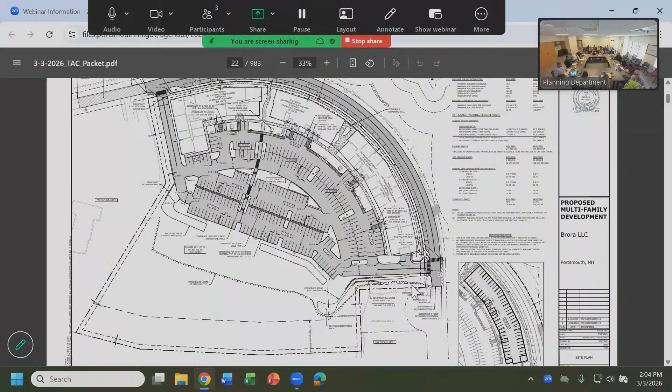I think the definition says in between buildings, so it's on the end of a building - maybe it could just be included in the park. Okay, which is, even though it's across the street, could be part of it. As long as you provide - is there a crosswalk there? You could provide it, well, they can go across the crosswalk, so you just include it and not call it a pocket park. Okay, easy enough. Great. Yep, we will do that.

The next one's related to confirming the rim elevation of PTD 1. The rim elevation of that trench drain is currently proposed above the flood elevation of the downstream connecting manhole in the 100-year event, so that should be okay, but we can confirm it further.

The next one: shift PDMH 103 north a bit to ease the flow path. Agreed, we will shift it slightly to the north.

Number 4, I touched on it, but this has to do with removing portions of the head wall. There's comments about the design of the drainage related to the emergency access road. I think I touched on that at the beginning.

Number 5, confirm in writing the entire run of sanitary sewer from SMH 1398 to PSMH 1 is currently 8-inch PVC. So Tighe & Bond agrees to investigate that further and coordinate it with the Department of Public Works.

Number 6, the proposed fire hydrant on the south end of Building C should be located 40 to 50 feet south on the opposite side of the road, about 10 feet past the asphalt sidewalk. The hydrant will be relocated accordingly.

Number 7, full width pavement repairs, mill and overlay need to extend up and completely repair the roadway in the area of the power extension. We've been looking at this further. We think there's an opportunity to put the duct bank under the new sidewalk we're already constructing, so we plan to look at that further. We looked at it preliminarily before this meeting. We think it's a possibility, so what we asked for there is just a stipulation that we continue to work with the Department of Public Works and PSNH on the final design of the electric layout.

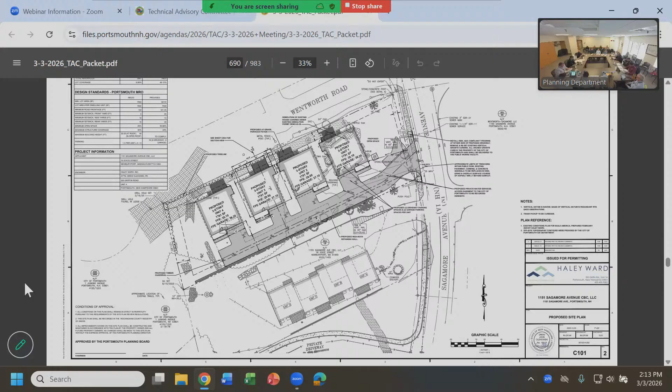Any comments, questions from TAC members?

If none at the moment, I'll open it up for public comment. Anyone here wishing to make public comment on this application? On Zoom, if you're on Zoom, raise your hand. All right, seeing none, we'll close the public comment portion and open it back up for further discussion or motion.

So the idea on the new curbing instead of the guardrail is that you can plow right over it? That's correct, yeah. And we did leave a gap there just for stormwater runoff relief, just to get from that gate, the driveway to the forebay.

And how's that plow gonna turn around? Have to put back into somebody's driveway? That's the idea, he'll have to coordinate with the residents. Does that turnaround also pertain to like an ambulance getting in and out of the site? So we didn't provide a fire truck turnaround just because these buildings will be sprinklered, so that wasn't required. Again, it is the idea that they will have to back out or use those driveways.

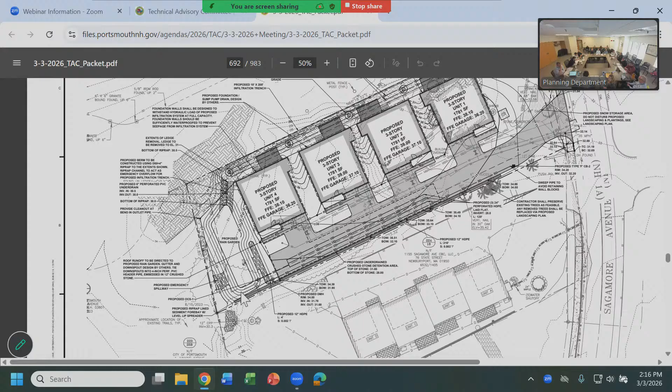So in that emergency spillway at the very back, what storm is gonna cause that to activate? We actually didn't run a storm that even reached that spillway. We have sized that infiltration system in the adjacent driveway to accommodate the 50-year storm, so we didn't even check to see if that's needed. It's really just like absolute worst case scenario, if something gets clogged or something like that, it'll be used. But any of our models didn't even reach that point. Okay, great.

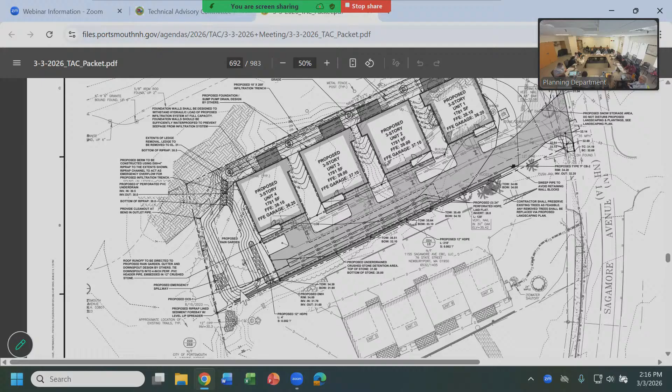Are you guys all set? Stipulations? I'm all set. I'll make a motion to approve. What kind of stipulations do we need? We don't need a CMMP on this. Unless you guys have things you're still working on, I think. No. Let's make a motion to send to the planning board with a favorable recommendation. Second. Any discussion? All in favor? Aye. Alright, motion carries. Okay, thank you.

Alright, item C, it's the request of Atlas Commons LLC for property located at 581 Lafayette Road, requesting a second extension for site plan approval. Property is on assessment map 229 lot 8B, and lies within the Gateway Corridor.

So in order to get a second extension, they have to come back to TAC and then go to planning board. I think on the site plan side, you can decide if you send this to planning board. We have to go to planning board? Yes, it's up to both bodies whether they want to have a public hearing or not.

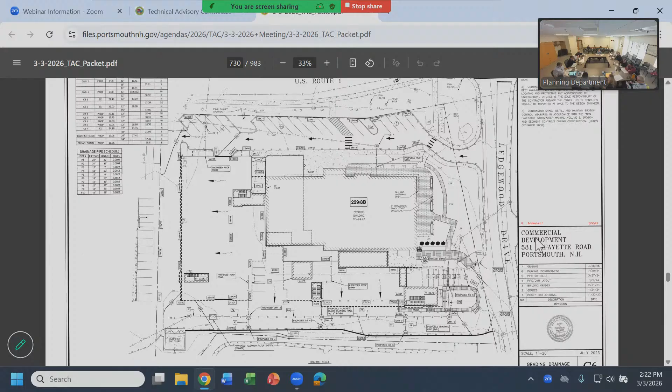So it's just some edge grades and interior grades underneath that area on the left or west side that's sort of open to parking at first floor level. There was no changes to the drainage structures. On the open space plan C7, we did make some minor corrections in the totals. The on-site community plan didn't change. Landscape maintenance area, again, just some minor square footage updates, and no change to the fire truck and delivery truck plans. And the rest are just detail sheets and they did not change either.

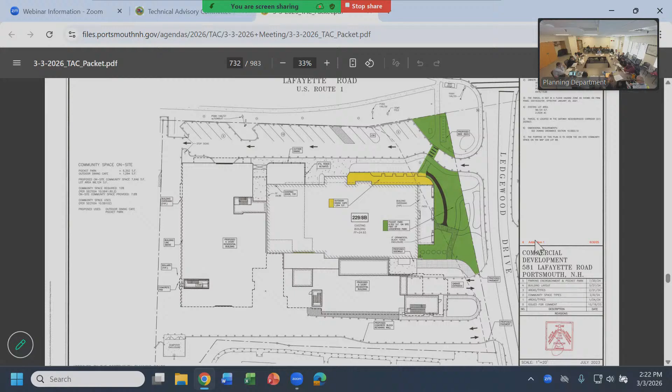Since the approval, it's worth noting that we went to the city and worked on the public realm improvements, which involved going to the Trees and Greenery Committee because there was some removal of public trees. We got their approval, and we worked with conservation and the DES and obtained a wetland permit for the wetland impact. So those have all been accomplished and are ready to go. I included the permit in the application material. We received some comments and I handed out a response too.

So first, it appears the existing bathroom sewer services will be directed to the grease trap. Domestic waste should not be directed to the grease trap. So we updated the utility plan from the site plan set C5 and added some notes to connect the grease trap flow to the grease trap and connect the sanitary flows. Those are noted below the existing building label. Those are the two notes there.

The second comment was to add a culvert to the public realm improvement plan located somewhere between the shed and the pool building, with a minimum size of 15. The 8-inch culvert may still be necessary, so we left the 8-inch culvert in, and we added on sheet 5 of the public realm grading plan a catch basin so we could get depth, and it goes under the sidewalk and exits with 50 feet of pipe. We added 3 details: end section detail, trench detail, and catch basin detail. I don't know, it might be appropriate to put a stub on that basin in case some other flows want to be connected in the future, or we can discuss that.

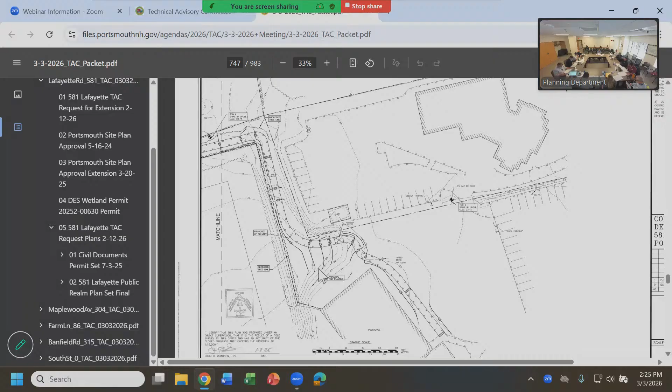On sheet 5, actually on the profile plan, P1 plan, it shows the area around station 2+0 where we raised up the grade, and we've taken out the culvert. We made a note to see detail I on sheet D2, and included that detail, which has the preferred construction for that crossing with 12 inches of 4 to 6 inch diameter crushed rock. The top items remain the same, with a Mirafi 160N fabric between the gravel and the rock.

If there's any other comments, we'd be glad to talk about them and address them. But I think that concludes our submission today and discussion. All right, open up for comments.

Did your parking calculations change at all with it going from the 90-degree spaces to the angled spaces? I didn't see a parking table in there. Yeah, those parking calcs were updated, I believe, in the planning board submission, because at that time we had to update to the angled parking.

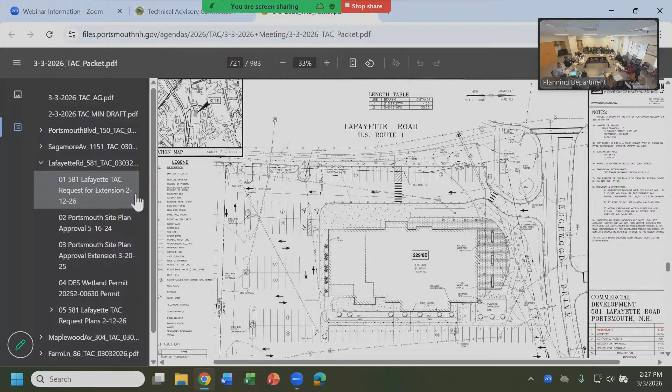I'm looking at the submission we made to the planning board at that time. The site plan contains a total of 178 parking spaces. There's just an encroachment of 30 spaces on a portion of land owned by the state of New Hampshire. With the alternative parking layout, 7 spaces would be lost, and I think we took that into account.

So you still meet the requirement. We knew that was coming. We didn't update though for the change in the ordinance, the 1.3 reduced to 1. So that gives you a little more cushion, yeah.

And I know we submitted for a conditional use permit. Right, that'll go to planning board. But they don't need input from you on that part of it, not from TAC. And I don't think the ordinance has changed in regard to that, or it's vested, right? So any changes to community space requirements or any of that, this is still vested, and I don't think they're having anything related to this that would affect this district.

All right, any other comments? Another one: on the basketball court in the cul-de-sac, have you worked with the school department on that? Yep. They're okay with it? There's a post out there? Yeah, I worked with Ken Lynchy and originally we had it in a different orientation. We moved it around. I didn't know if having it out in the pavement like that, it could get in the way of any vehicles needing to use the area for a turnaround. I think there's a difference in the post versus where the hoop is.

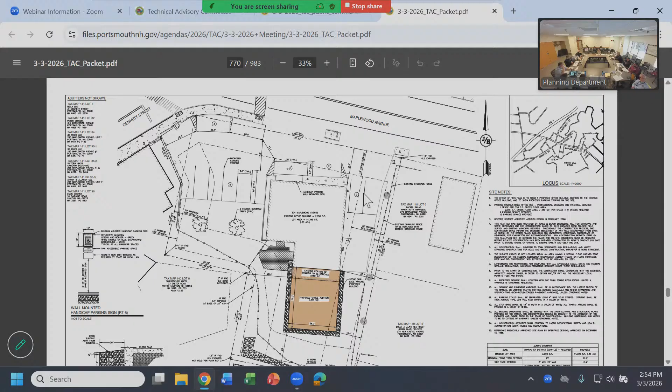And if the historic parking layout is found to be approved, then sounds like we can keep a portion of that. Yeah. I'll have to talk to the owner and client. I don't know if they could give up that much parking and be expected not to use it from time to time.

With this building, that would get it down to 7 spaces, which is really lower than they need, I believe, but I'll verify that. Peter, are you saying that if there's a parking plan approved years ago, you can just choose to go back to that one? Well, if they don't change it, you know, it's what it is.

Well, but it's not what it is, this isn't what it is now though. It's different than what the historic plan was, right? I believe so. The historic plan, I don't think was as detailed, and they used it that way, but if you go out there today, you won't see much for any striping. Most of the striping's just deteriorated. But if the city approved a plan, yeah, they should be able to use the most recent one, the most recent one. Right.

Or they can get the CUP for one that doesn't comply. Or a variance if the parking in front of the building's the problem. Most recent striping was all head-in parking there. They got rid of the angle spaces.

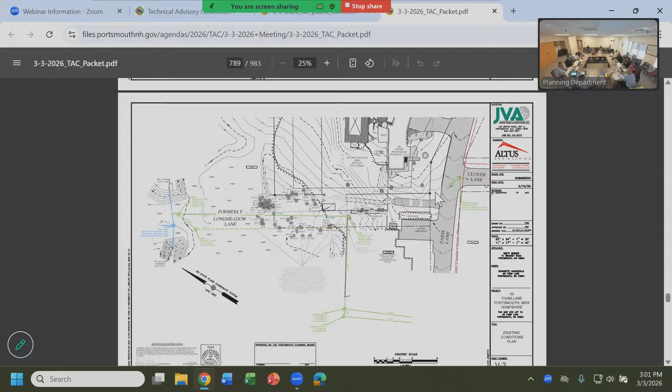So I don't know — you don't need a street name if it's only 2 houses off it. 3 houses, right? Well, the one house fronting on Farm is also a street, so do we need a road name on that? Not for only 2 driveways off of it. If it were 3, if the existing house connects, yes, but not for 2. Even though it is a city street? It's a city street. I guess I don't understand, so I'll stay out of it.

Confusing — that's actually part of what forced the road design and so forth, is that we can't have a private right-of-way in a city; it needs to be an acceptable, recognized city street. So somewhere down the line, we'll need to rename that street.

Short Middle Lane. Short Street. We have a Short Street. South Long Meadow. South Long Meadow. Short Meadow.

So getting back to the plan, the existing house will stay. There's a pool and deck in the backyard, and both will be removed because one will be over the property line and the other is in the setback. So the deck and the pool are removed as part of the site improvements as we move forward with the project.

Long Meadow Lane right-of-way, as you can see in the plan, goes through the shed of the abutter towards Spalding, to the west, as well as their driveway and hedgerow. So instead of causing a problem with them, we're shifting the roadway and adding some right-of-way, about 14 feet, towards Jeanette's existing house, number 86, to shift the road, and then once we get past their property, we shift it back fully into the right-of-way. That's why there's a funky little jog in the roadway.

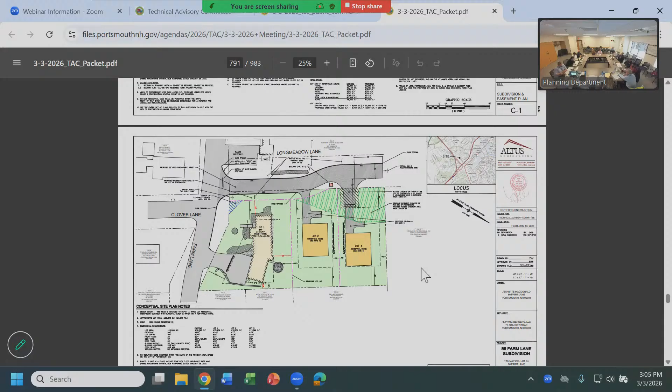Then if you can go to the grading plan. No, yeah, the roadway plan is fine. So we have two bioretention basins.

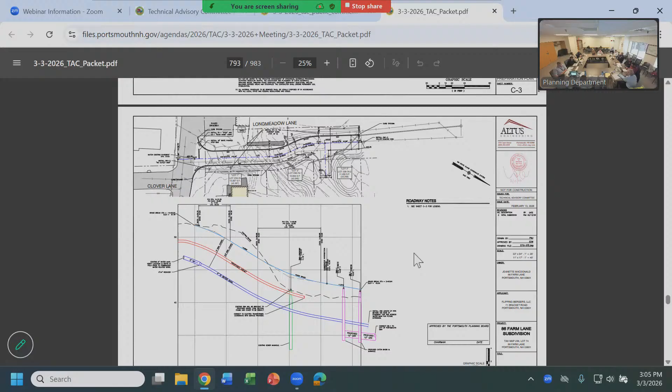One's on the middle lot and one's on the back lot. The one in the middle lot treats runoff coming from part of the back of the MacDonald house, as well as the middle lot, lot 2, and the right side of the roadway up to the driveway. The second pond treats primarily runoff from the right side of the road, the hammerhead turnaround area, and lot 3.

Both of those are combined and then discharged down the city right-of-way to an existing drain manhole that's in cross-country, which will tie into the city drainage and then eventually down to Hodgson Brook. The catch basins in the street have a deep sump and a hood, and the bioretention basins are under-drained.

The one in the middle lot, Dave came out and witnessed test pits that I did out there with really poor soils. The second test pit was a little bit better, so we are providing a little bit of infiltration in that one.

The way the site naturally grades is that it's a depression, and basically where the bioretention basin on lot 3 is, there's a hole, so the water doesn't ever leave there. The water naturally ponds up and goes onto the abutting property to the north. So how we modeled the runoff is we oversized it to ensure that in all storms modeled, the ponding that occurs in that area is lower than what the ponding occurs there under existing conditions, so that we're not making that ponding any worse on the abutting property.

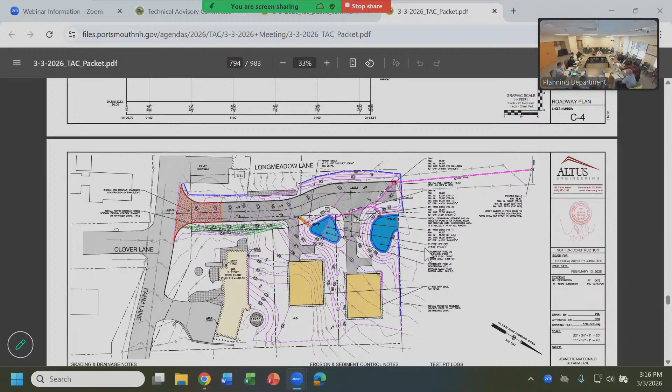So this also needs a site plan, and Eric and I have talked, so he's preparing the additional checklist and stuff for site plan review. Okay.

So probably come back at the same meeting. Okay, with the street, with the road change.

I do have one other question, similar to 409 Lafayette, where we had a back lot. Do you want street addresses out front or something like what we just had done on that? I would recommend a sign out there pointing, so if they're gonna make this a different street name, then it won't matter, there'll be a street sign. Yeah, so I have a street, I just don't know which way it's. This is a public road, so that's would be, probably, but that's where the other one wasn't.

But that's not gonna continue to be Long Meadow Lane. Correct, right, okay, that's the important thing. It's not, it's a real estate road. We can't, because the whole thing's Long Meadow if it goes all the way to Betty's Green. It cannot stay Long Meadow because it's both contiguous. Right, be short meadow. Choose one.

Well, I think it would make sense that this has a new name. Is anything there on Betty's Dream on Long Meadow? It is, through 75, Long Meadow. I know that, but in terms of the street address. Yeah, 75 Long Meadow, yep.

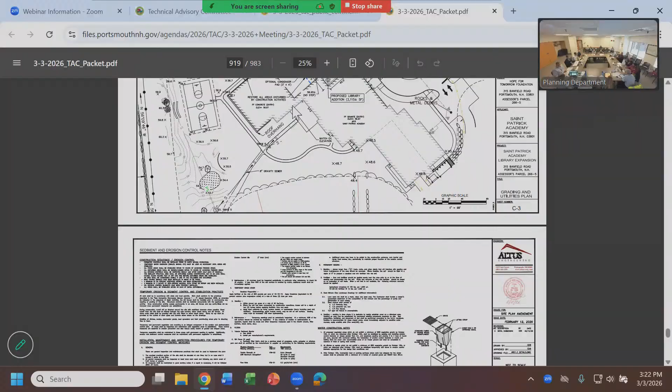The site impervious area increases from 15.9% to 16.3% for the site. We did provide a drainage memorandum addressing the small increase in impervious area, which will drain to the existing closed stormwater drainage system and to the rain garden located in the northeast portion of the site. We ran the HydroCAD numbers and showed that we still have a decrease from the pre-development conditions and the capacity to handle the small increase in flow.

There's no additional parking, not a lot of site improvements to the project. Rerouting the sidewalk and walkway around the building is the major site work, the additional site improvements outside of the building.

We'll be providing renovations inside the existing footprint of the building to provide 4 single unit bathroom stalls. So we're proposing to run a new sewer line connection out to the existing sewer that's running from the gymnasium back. We did receive some comments in advance of the meeting saying that the sewer line should be upgraded from a 4-inch to a 6-inch, which we have no problem doing.

One of the comments, we did show an external clean out right at the building for the sewer. We'll keep that there. There was a comment, I believe, to also add a clean out at the connection point.

Can you, Peter, go to the next sheet? Yeah, so, or maybe the next one. There we go. So where that green proposed sewer line is, I believe there was a comment to add a sewer clean out at the connection point to the new line.

If it's a 4-inch line, we would prefer not to - I don't know who made the comment - but it's a 4-inch line coming from the building, and the connection is in the middle of their soccer field. So if that is a requirement, coming out of the building we would try to 90 it or not run it that way.

Let's talk about the other stuff that's more important. Okay, so sewer, we're good.

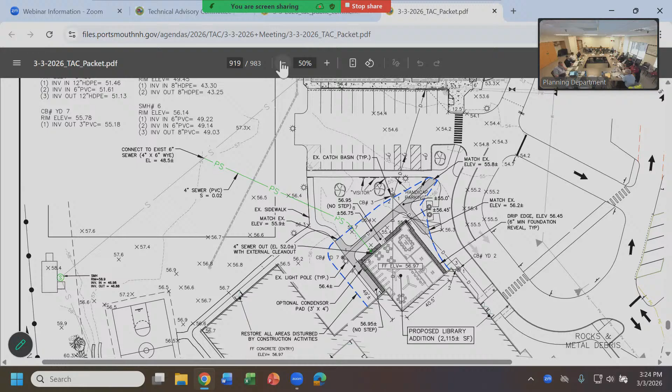Let's jump into the first comment, which was that this is an expansion of a non-conforming use and a variance would be required.

So St. Patrick's Academy received the zoning variance in 2016 for the use of an elementary school on the property. It's our understanding that this is an allowed use on the property and that this is not an expansion of a non-conforming use. There's no expansion of use. There's an existing library - we're expanding the space, but not the use of the school.

Additionally, when we submitted for the gymnasium, which was a much larger project back in 2019, we also submitted - I have the application letter saying that the gymnasium is an additional amenity to the existing school and not an expansion of use. It was concurred at that point that we did not need to go for a zoning variance for an expansion of a non-conforming use at that time either.

So our opinion would be that it is conforming, and we hope that we don't have to go for it. Our opinion is that they made an error at that time, and this is how we would treat it. But just because they didn't catch it then, we think it needs to go for that, because the whole use is getting bigger.

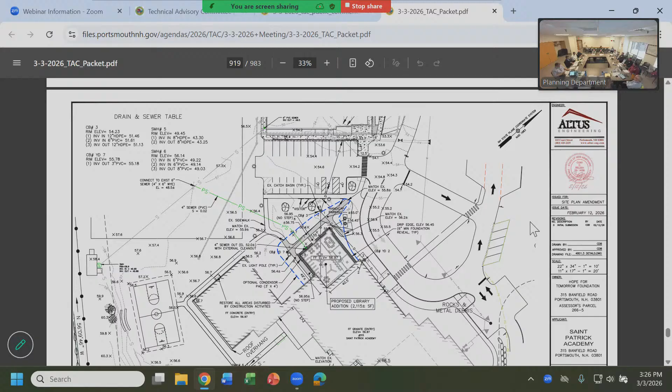Even though you're saying it's within the use of the school, I understand that, but - so the use, again, it's a library, it's a bigger footprint, the school has a bigger footprint. So any expansion of space is an expansion of use. Well, this is a significant expansion of space. If it was a little tiny addition, so you could put an egress door or something in, that'd be different, but if it's this much, then yeah.

The other piece of that is that it's currently a non-conforming use - the school. Well, it got a variance to be a conforming use. So we also have the notice of decision from back in 2016 that says the allowed use applies to the property.

I'm not the attorney, but I think what was presented to the zoning board was the school, and they were approving that application, that request. It didn't give them freedom to just expand on the property. If they had said the actual parcel is therefore granted this use change for this specific project, then this would be different - versus the project that was shown.

If they had any future expansions, we'd certainly have to go through the planning board, but the use of a school with its accessories is granted to the property, as long as that's what it says. But was that what was presented to the board?

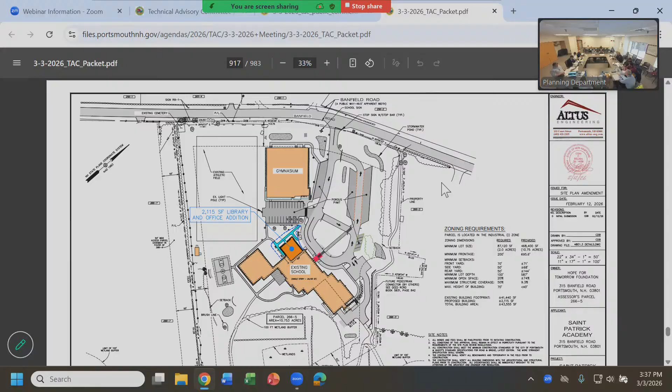What you're saying is that this could be built today in the original location? Well, there'd have to be some agreed grading and possibly some adjustment, but there's nothing restricting the construction of that in that area. As far as stormwater, rain gardens, and utilities, there's grading and potentially tree removals that might have to happen in that area. I think the aerial, that second sheet in that plan, shows it better. It's hard to say, but I certainly think it can be done and work, you just...

To the last comment. Okay, so...

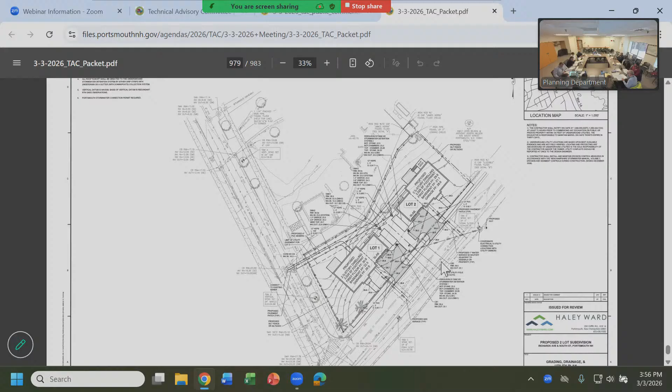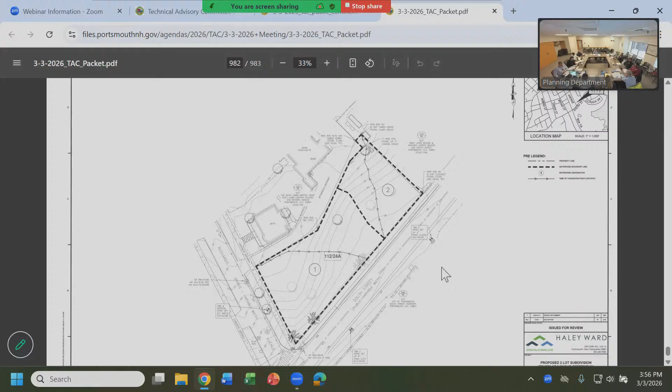There's the usual site detail sheets, and then I wanted to note that sheets 701 and 702 show existing and proposed subcatchment areas. And if you look at subcatchment area 2, which is on the north and flows off to abutting properties, the area of that is decreased. The building that's proposed would be guttered and directed to the stormwater management system. So there would be a decrease of area flowing to that abutting property to the north.

That's the presentation. We have comments that we received from committee members. It's appropriate to go through that at this time. And also we provided some updated plans.

So the first comment is the shared driveway comment, which we did look at and try to work with, but we would want to space out the buildings considerably more to be able to have the maneuvering space to make that work. And it just cuts into the building envelopes. So we're going with 2 driveways, which we feel is allowable.

Second comment, a right-of-way easement with a 10-foot radius should be donated to the city of Portsmouth in case future roadway improvements are needed at the Richards and South intersection. So plans have been updated, the subdivision plan, there's a detail on the lower right, a blow-up detail with a 10-foot radius easement area and a note near the street that says proposed easement to the city of Portsmouth, 48 square feet. So that's been added to the plans and also shown on the site layout plan.

Third comment is that the sidewalk on South Street shall be concrete and no less than 6 foot in width, matching the existing asphalt sidewalk to the proper grade beyond the lot 2 frontage. So the plans have been revised to show a 6-foot concrete sidewalk along South Street. The sidewalk expansion has cut into the green space to get that extra foot, just holds to the property. So there's no sidewalk easement or private part of the sidewalk that's not in the city's right of way.

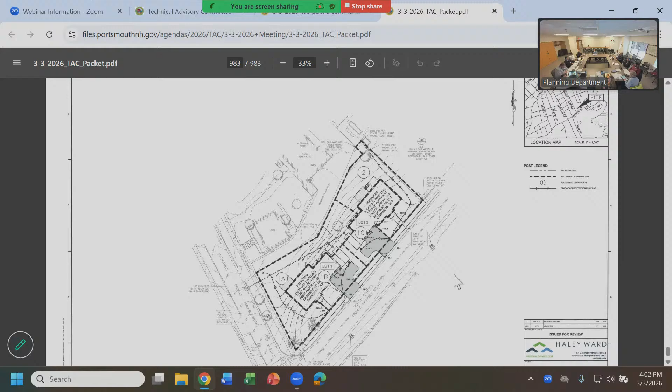So if you go to the site plan, you can see it's about 18 feet to the property line from the front of the house—18, or 19 and a half, something in that range. Its dimension, if you go up with the arrow to where those dimensions are—yeah, right there.

So what you're saying is if you came in here, straight, and then went left and right into the garage—you could go left and right into the garage, but that whole entire space is going to be needed for maneuvering. So you couldn't have the extra parking you get with your own driveway where you can park in front of the garage.

Couldn't you put the same thing behind instead of in front—a parking area for a second car? Then you'd be significantly increasing the impervious area. We wouldn't have to have it in front as well. You could switch it, instead of having it in front, have it in back. What, extra parking, extra space, extra pavement in the back?

There's a big drop off there. Yeah, it's a grading thing, and the runoff is a factor. I understand what you're saying, but I don't think it's practical, I guess.

I'm pushing back because I feel for the people who are going to live there. Getting in and out at South Street is going to be a challenge, and it seems like it'd be easier if there's just one of them doing it. People walking on the sidewalk are going to have two driveways to think about instead of one while they're walking their kids to school. It just reduces a lot of potential conflicts.

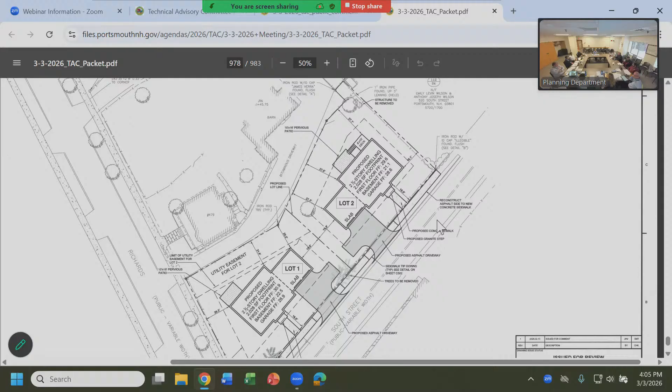There's a number of ways to do it, and if you can make it work... We understood the comment and explored it initially, trying to lay out the homes and make this work well. It was thought about, but it didn't rise to the level of working with the way the lot development was.

Peter, did you suggest maybe just getting rid of the first driveway on lot 1 and connecting lot 2 and 1, so you drive in one and then shoot right through? I don't think it matters specifically where it is, but anything could just make it one. Maybe more gymnastics even to do that, but...

Honestly, it meets standards. It's up to the planning board to approve this or not. I've looked at it, I think it's okay. I understand your concern, but trying to piggyback one driveway onto the other lot is just gonna make it worse, I think.

In order to use that turnaround, they have to park in the garage, because if they just park in front of the garage, they'll have to back out onto South Street anyways. Can't do that. That's physically what they'd have to do if they're not parked in the garage. But you can do that on a residential, single-family lot.

Once you get into the shared driveways, you have to deal with a whole other level of maintenance agreements, you know. People want to be able to control their own destiny.